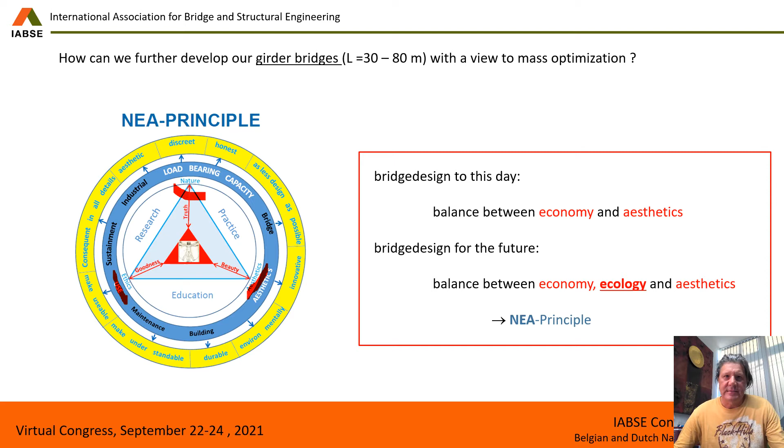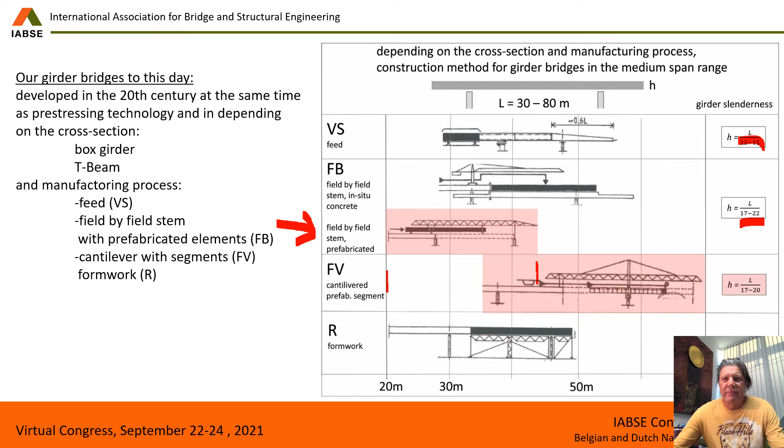If large prefabricated parts are used over an entire field length, the maximum spans are from 20 to 40 meters. The field-by-field system serves as a preferred manufacturing process. Historically, at the beginning of the 20th century, the plain parallel girder was used at a much later point in time than the haunched girder. The haunched girder, in turn, followed the development of the frame, and this in turn the development of the arch.

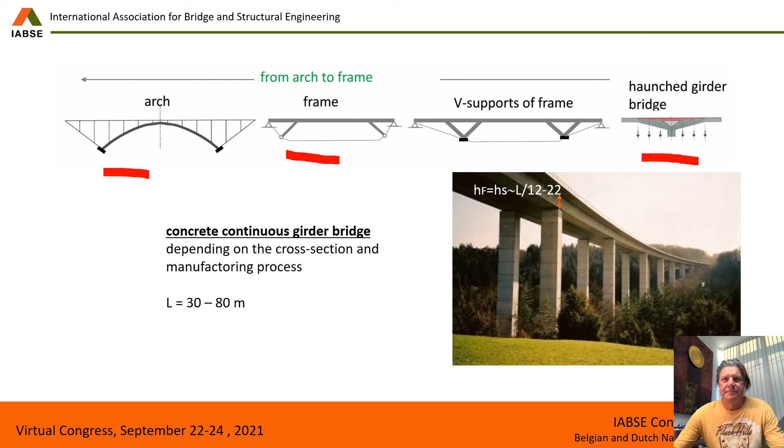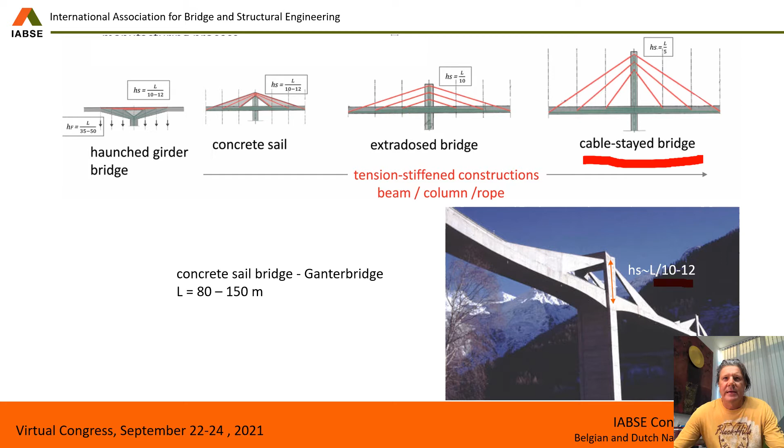The mentioned slenderness of both systems, the concrete sail and the plain parallel girder bridge, are also used in the design of the UHPC system, as we will see later.

The resource efficiency required at the beginning of my lecture, or the introduction of ecology in bridge construction, is achieved by optimizing the material, structure, and manufacture. The material is denoted ultra high performance concrete, named UHPC, with steel fiber and steel bar reinforcement. With increasing strength of the material, the energy consumption and global warming potential in relation to the compressive strength decreases.

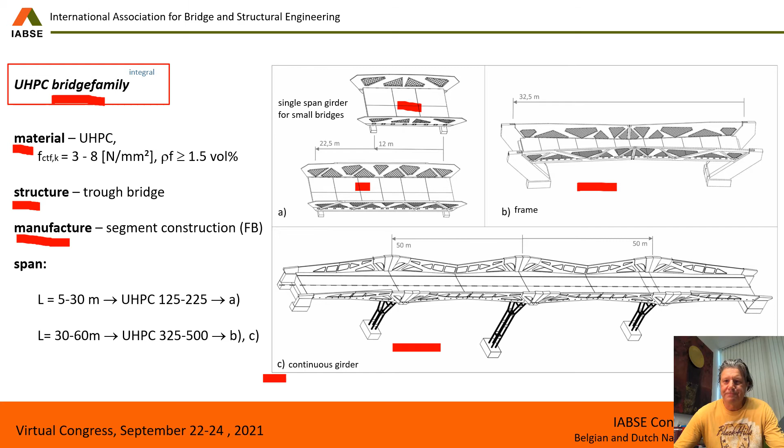The loading of the UHPC trough plates takes place as a shell, which means the designs are surface active support systems. The structural efficiency is further increased by two folding steps, alpha 1 and alpha 2, and is based on a vertical element.

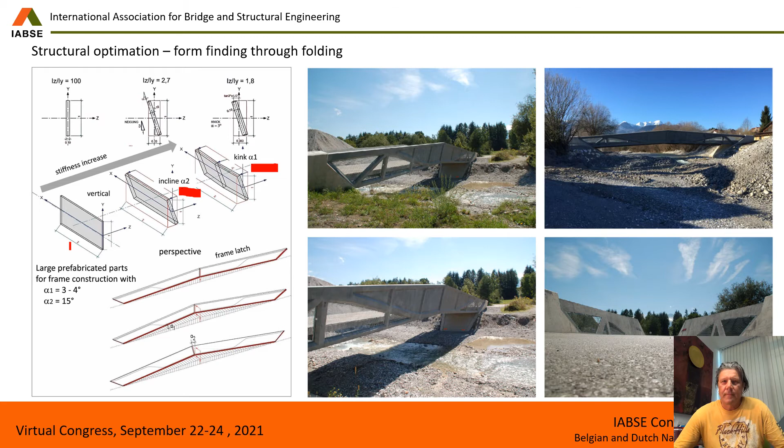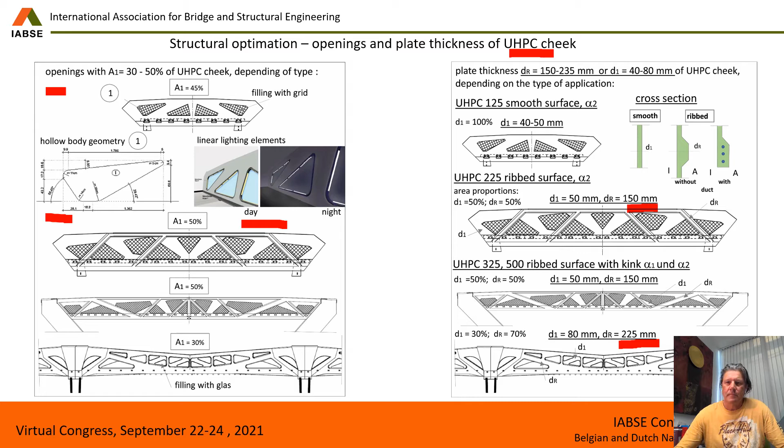An additional optimization of the structural efficiency is achieved through an integration process. The monolithic construction is directly connected with the increase in lifetime, or the increase of durability, of the bridge construction. The implementation of the integration in the UHPC bridge family integral takes place through decoupling.

In order to minimize constraints from load-independent effects, even for long bridges, the deck slab, system 2, is structurally separated from the longitudinal main support system, system 1. Both systems, system 1 and system 2, form independent decoupled integral systems in the longitudinal direction. By using white cement, the light coloring of the UHPC trough plates also leads to lower temperature loads.

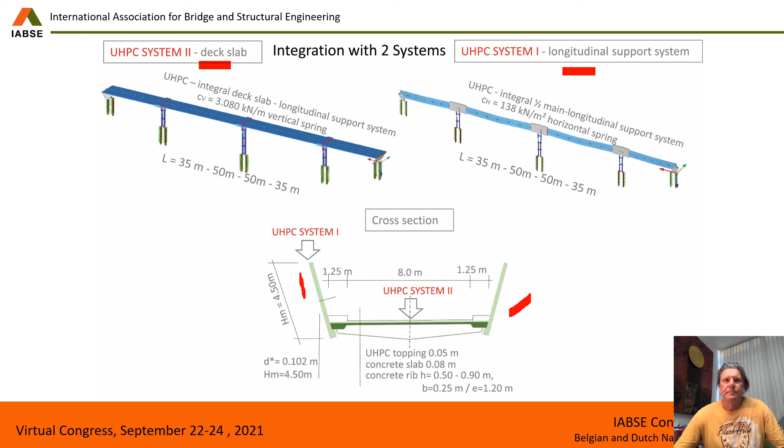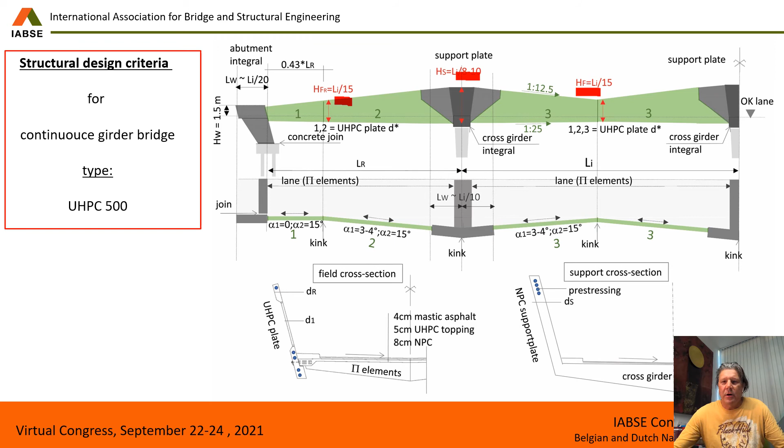With these structural design criteria for a UHPC bridge, a 170 meter long 4-span road bridge with spans of 35, 50, 50 and 35 meters, a comparative calculation with a pre-stressed concrete bridge was carried out with regard to masses and CO2 savings. You can see it on the next slide.

On the left, the cross sections of the two 10.5 meter wide comparison bridges are shown. The mass saving of the UHPC bridge compared to the pre-stressed concrete bridge is approximately 40%. The CO2 saving from cradle to gate is approximately 15%. If the performance of the steel fibers, which mean a high level of energy input into the UHPC matrix, can be improved, CO2 savings of up to 22% would be possible.

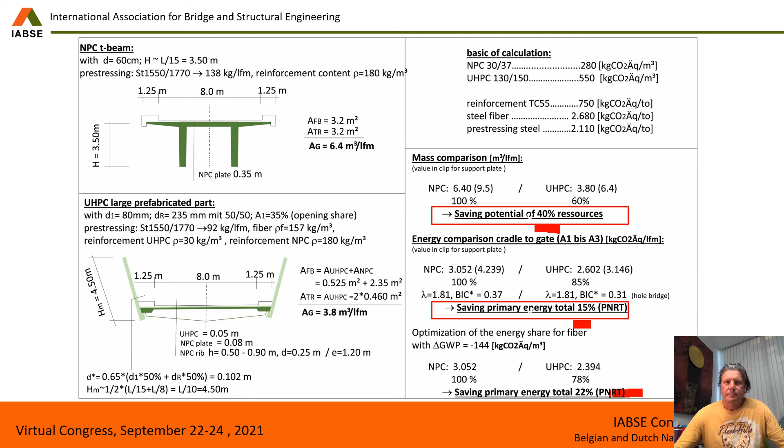With this slide, I would like to come to the summary of my lecture and the advantages of using UHPC bridges. If UHPC bridges are planned appropriately to the material, it is possible to achieve enormous mass savings as well as CO2 savings. A prerequisite for this is the use of the high-performance material UHPC as a surface active support system.

With the introduction of the structural ecological efficiency factor named BIC*, an assessment of bridge design with regard to structural and ecological efficiency could be given in the future. Civil engineers should consider not only economics and aesthetics, but also the ecological efficiency of the design.

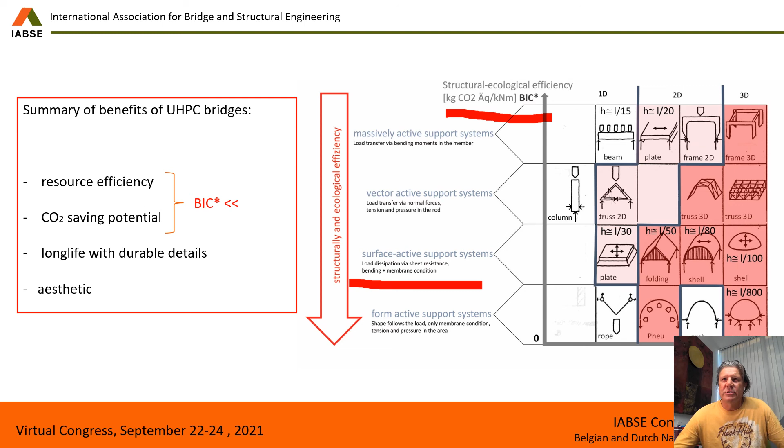If we use UHPC appropriately to the material, it's particularly suitable for monolithic construction without bearings and transition joints, and if details are also appropriately designed, this enables a long lifetime for the construction. As far as the design and aesthetics of a UHPC bridge are concerned, I'm of the opinion that UHPC can make the line of forces even more visible, and thus offers ideal conditions for beautiful constructions.